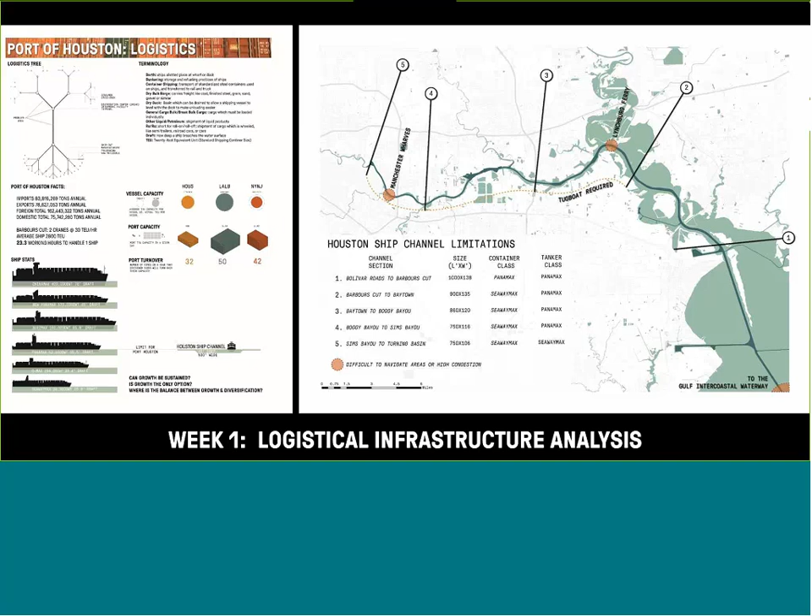Week 2, we went out to the bay and started to meet with the Audubon Society and other people that have an interest in the bay. Then we started to look at how these enormous chemical plants impact the bay. They provide a lot of funding to rebuild habitats, but of course at the same time they also create a lot of pollution, both in the water and in the air. Then we met with all the various mayors and municipalities that surround the ship channel to understand their issues.

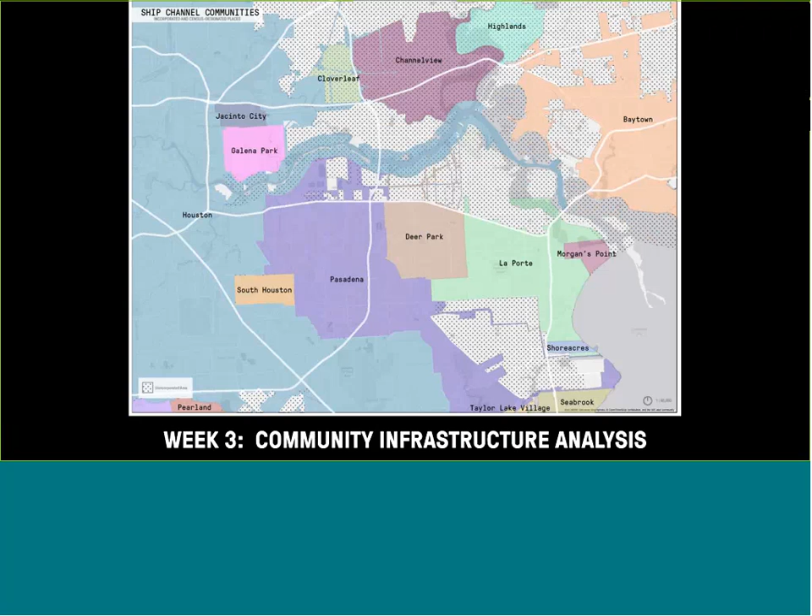And then at the end of it, we did a big presentation. The county commissioners came, we had city council people, we had all these people from the port, different mayors and organizations from different cities around Houston that showed up. So it was a big deal. And again, we really used it to try to say, look, SWA, we're the guys at the leading edge of infrastructure and understanding what that means to cities.

Now I think we're going to get a little bit into the project itself. Here on the screen, you see an innovative way to map Port of Houston through the flows and dynamic forces coming through it. That's what we were trying to push the students and ourselves to figure out, how do we define Port of Houston as landscape, because a lot of that is predicated upon how we visualize Port of Houston as landscape. So it started from the mapping techniques and went all the way into some design proposals.

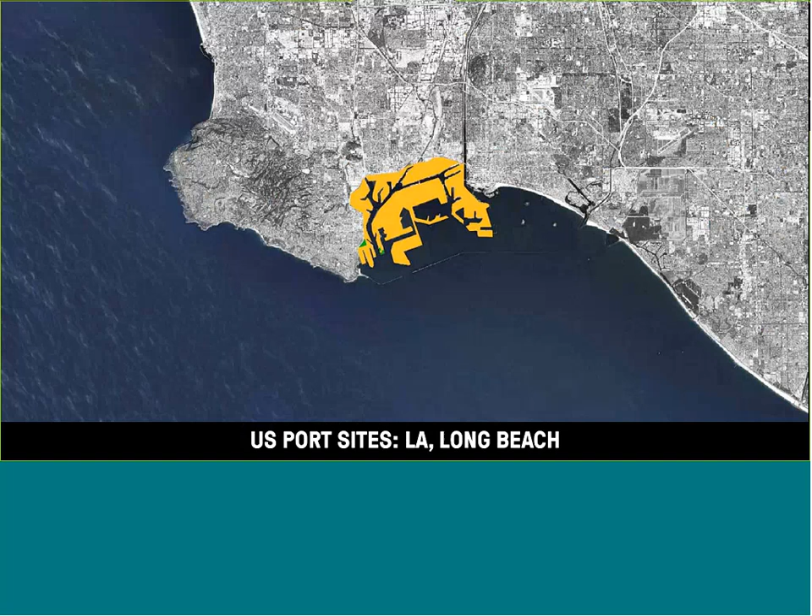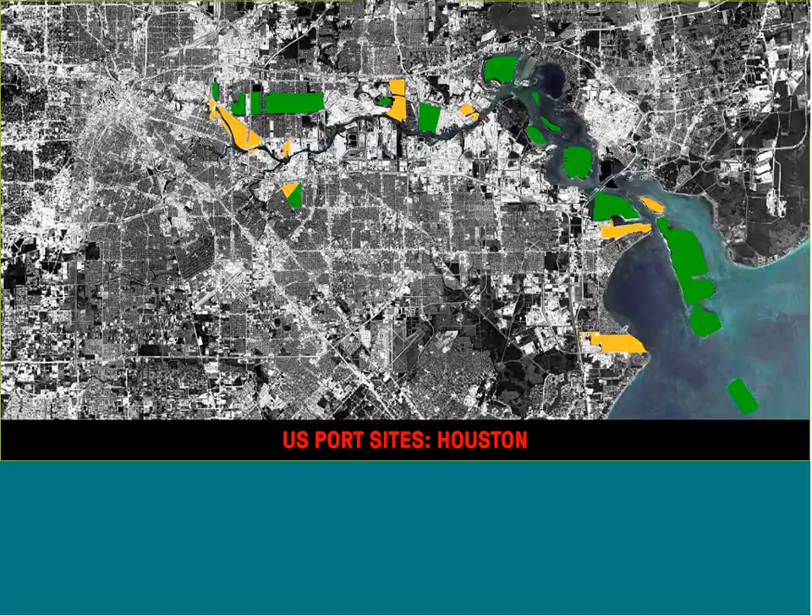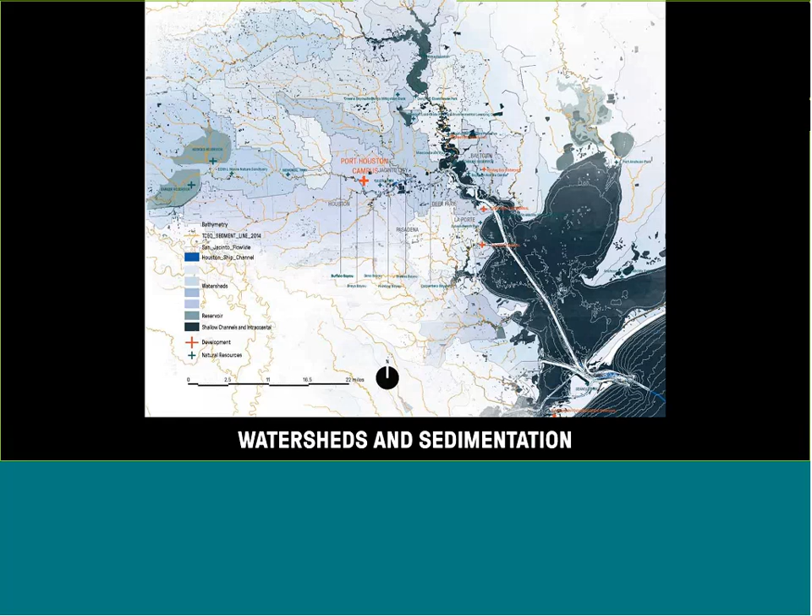So what's unique and interesting about Port of Houston versus other national ports, such as Port of Los Angeles, Port of Miami, Port of New York, New Jersey, and Seattle—here you look at Port of Houston, you can immediately see the difference, how vast and expansive it is in terms of its land ownership. The reason being, unlike all the other ports, the unique quality of Port of Houston is that it makes land. All of the sedimentation running into Buffalo Bayou eventually has to be dredged out and results in formation of islands in the bay.

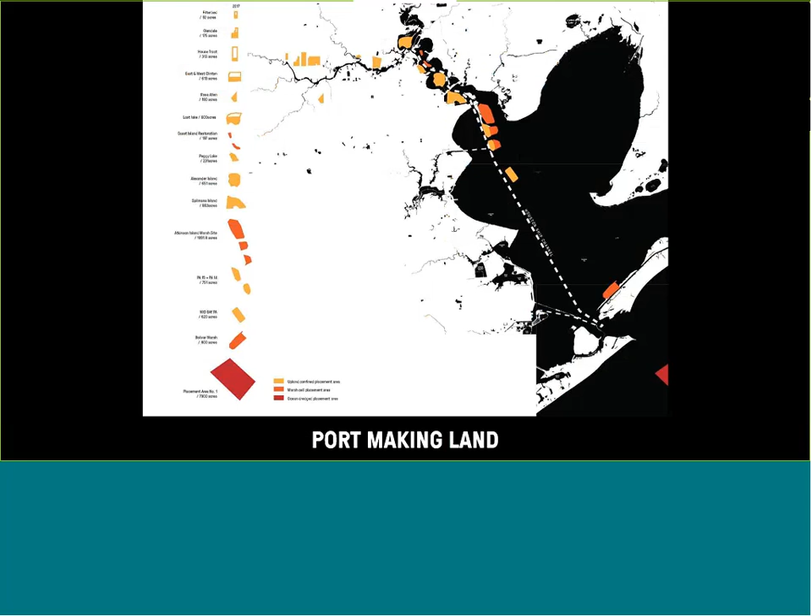And so all of these shapes in yellow and orange that you can see on the screen is what the port has made over the years of its operation, which is completely remarkable when you think about real estate creation by the sheer fact of this entity's existence.

And another interesting point about the port throughout its history is, as Kinder pointed out, it started out at Houston downtown, where Buffalo Bayou Park ends now, and over the years, because of the limitations of draft, it did not allow larger ships to come in.

Port of Houston moved from downtown on the left of the screen to its current location, and the dynamic changes keep on going - urbanization currently is encroaching on the edges of the port from the west, and draft limitations are still pushing port operations to the east, because ship technology is constantly changing as well. In the meantime, dredging operations keep producing these mounds, lands and islands in the ship channel.

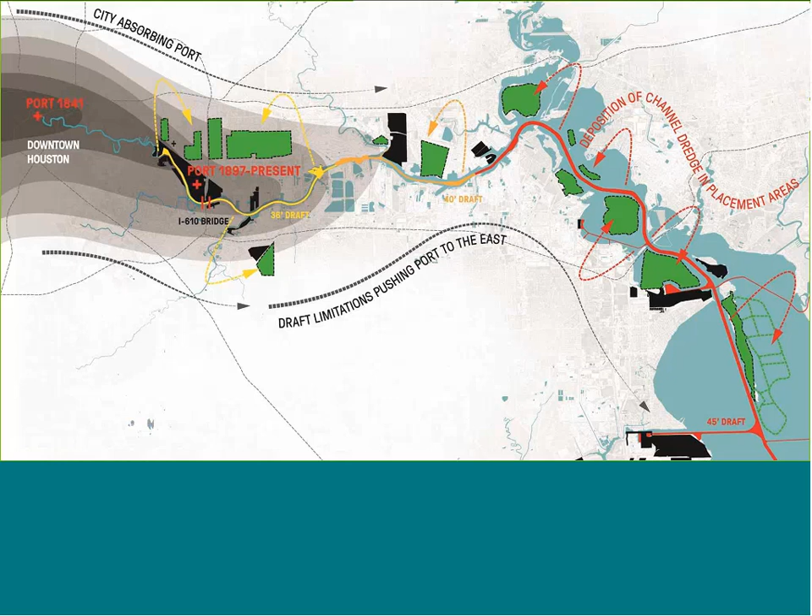So these conditions created underpinnings for our approach to the project and selection of the site, because obviously in 8 weeks' time we cannot take on 40 miles of ship channel and adjacent lands, and we really had to be strategic in what would be the most beneficial areas of study for us and for the students as well.

Because of this encroachment from the west and this expansion to the east and to the bay, we thought that these opposing sides on far edges of the port would be most affected by the change. And therefore, we wanted to take on those sites that were anticipating change to happen to them going forward.

We were interested in what would happen if we brought a landscape architectural approach to the logistical landscape of the port, which is never thought of in terms of parks and recreational areas or community connectivity - those kind of terms at all. It's just always thought of in terms of logistics and industry.

And we applied the principles that we would normally use in the project, such as striving to provide connectivity and accessibility, enhance legibility and aesthetics of the site, as well as creating programmatic activation to the degree that it is possible, where the communities interface with the port and where it's safe for people to interface with the port. That would make sense.

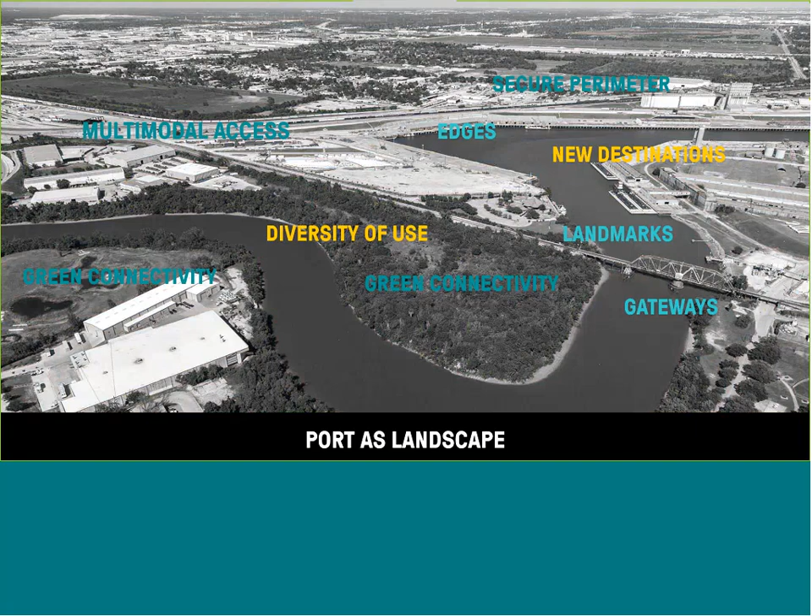And this is what - you start applying the lens of landscape architectural methodology, and you start looking at the port site completely differently.

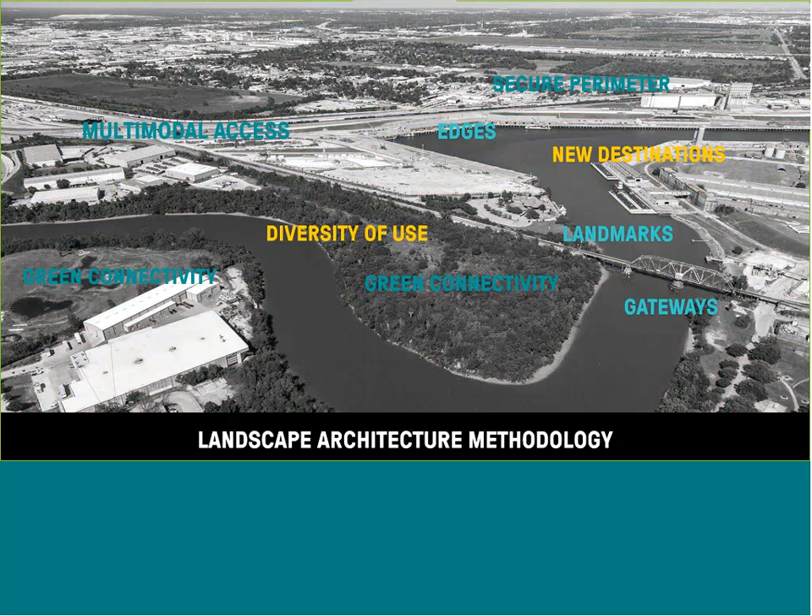So firstly, we are going to look at site 1, which is closer to the core of Houston.

As Natalia mentioned, there are many unique aspects to the port, one being that it's really embedded into the fabric of the city. So you get conditions like this, where you have neighborhood right next to industry, and you have open spaces, such as, in this case, Morgan's Point Cemetery, right next to the container cranes in operation as a backdrop. So it becomes a really surreal environment.

This is what we looked at - let's see this pointer if I can. What we really looked at was the last 2-mile stretch of the ship channel for this site, and another site which serves more of the ecological services to the east near the bay. So the last 2-mile stretch is in a highly visible position in the city.

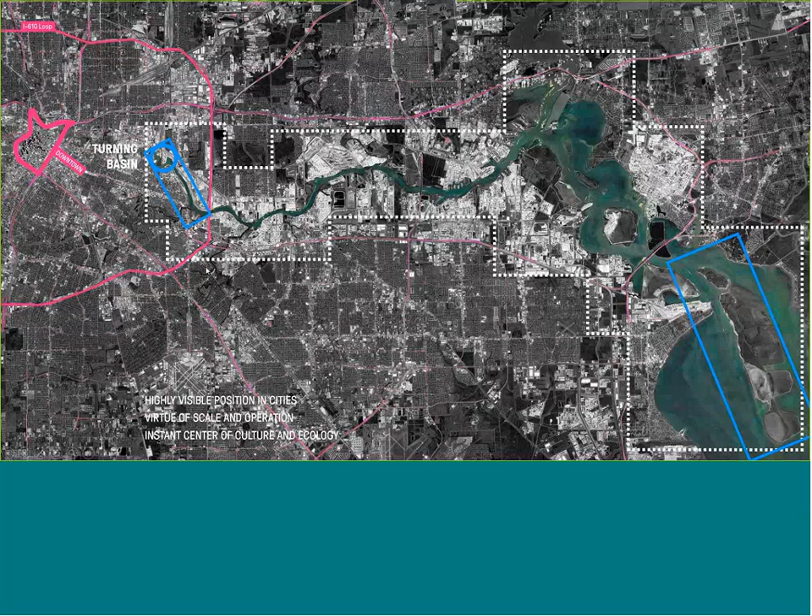It's along the 610 loop, which really begins to frame Houston, the Houston expanse, with downtown being centrally located. And by virtue of its scale and operation, we knew that it could become an instant center for culture and ecology.

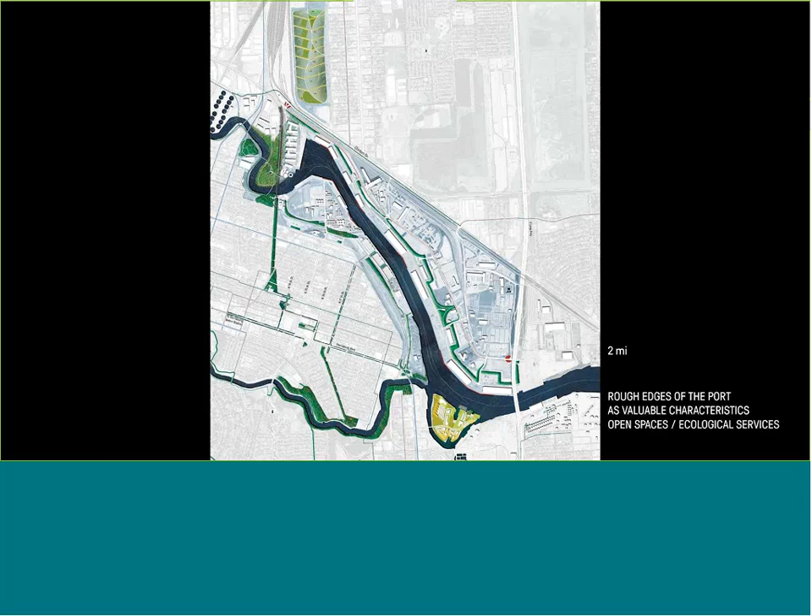So what the students and us started really looking into was how to transform these rough edges of the port, again, as valuable characteristics. And they began to inlay it with soft systems of open spaces and ecological services. We specifically looked at these 3 opportunities within that 2-mile stretch.

The north one being more active programming, with soft elements like a neighborhood park, transforming the dredge island of the port into a neighborhood park that gives back to the community. Centrally, looking at transforming some of the existing warehouses into active urban programs, and then also transforming an existing program that is already embedded with one restaurant and some other neighborhood activities, and really amplifying those characteristics to serve the neighboring communities.

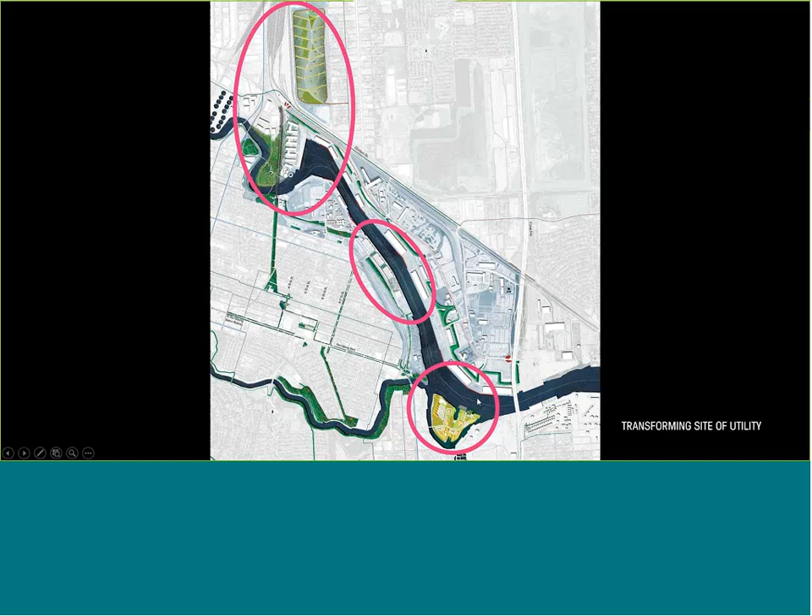What we also looked at was introducing a green system, a green belt loop around this development that begins to really tie in and thread in the communities and also the mobility systems that exist around there.

So, as Natalia mentioned earlier, knowing that the north side of the ship channel has the potential of becoming almost obsolete as we look at the post-Panamax era, where ships are getting too large to even navigate the northern part of this area.

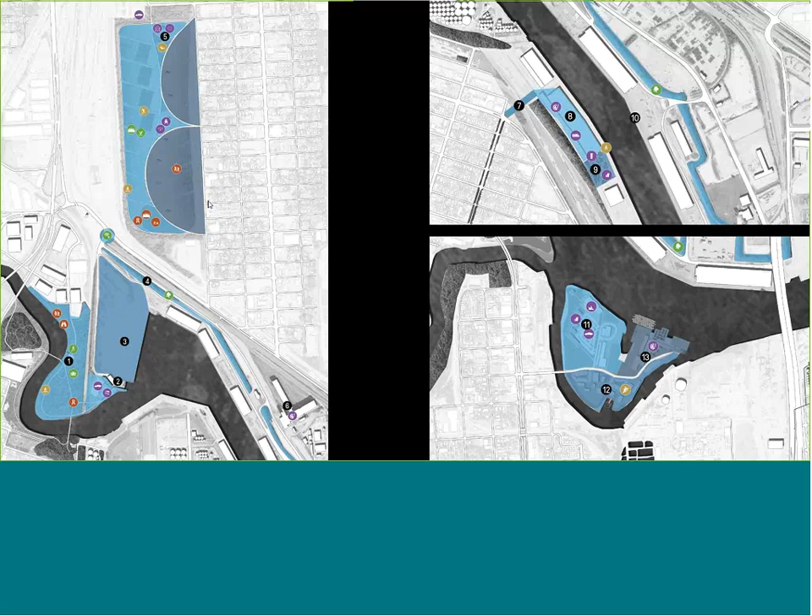So to really look at orchestrating urban development in terms of understanding what sites would be available in the future and what sites are available now, so the Port of Houston can look at embedding a program that could begin to think in terms of the near future and also maybe 30 years from now, where they begin to occupy this part of the site that is an existing port function.

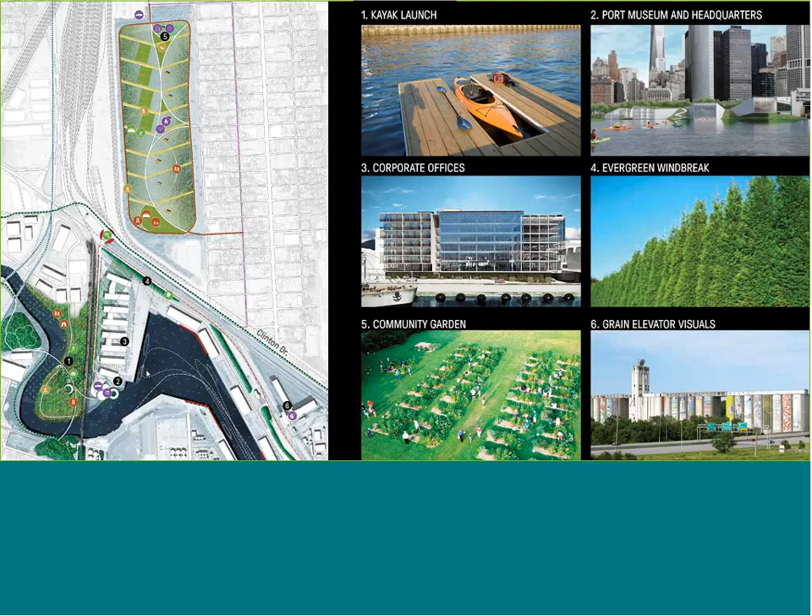So again, just embedding programs that begin to address community needs while giving Port Houston an identity within the city of Houston. And also introducing exciting programs that begin to frame arrival into the port, a gateway experience that begins to not only frame Port of Houston, but also frame the visitors' understanding of their own city, understanding of how the port operates and how the surrounding neighborhoods are meshing with the port.

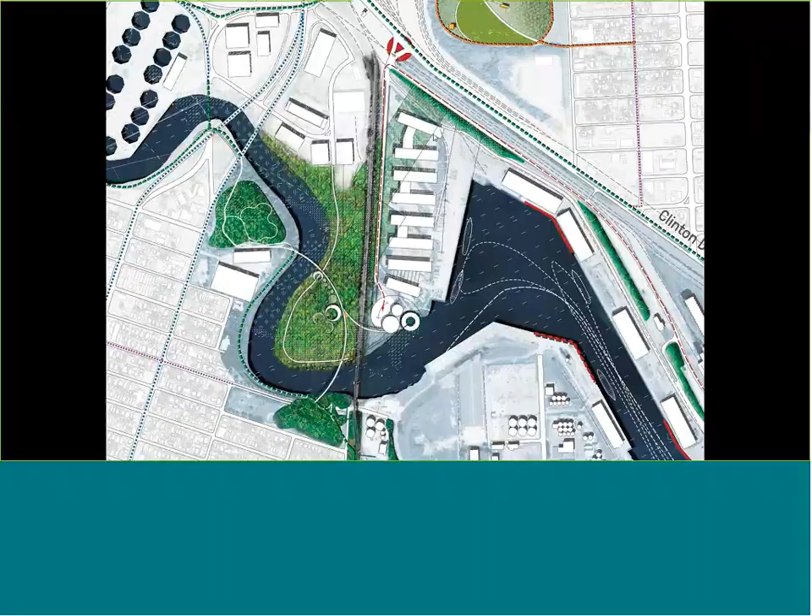The second site that we looked at within this zone was really occupying existing warehouses and converting them with programs that again begin to address nearby communities, but also make the city of Houston aware of the opportunities that exist on the port.

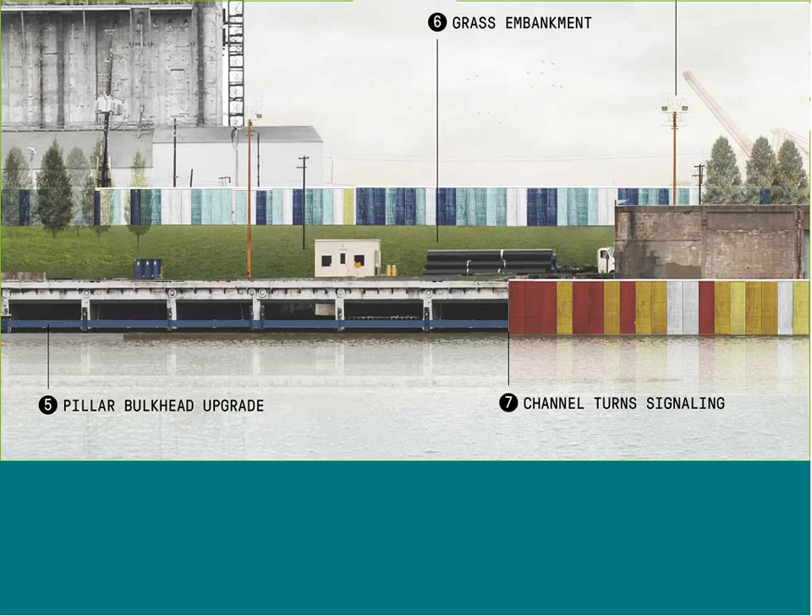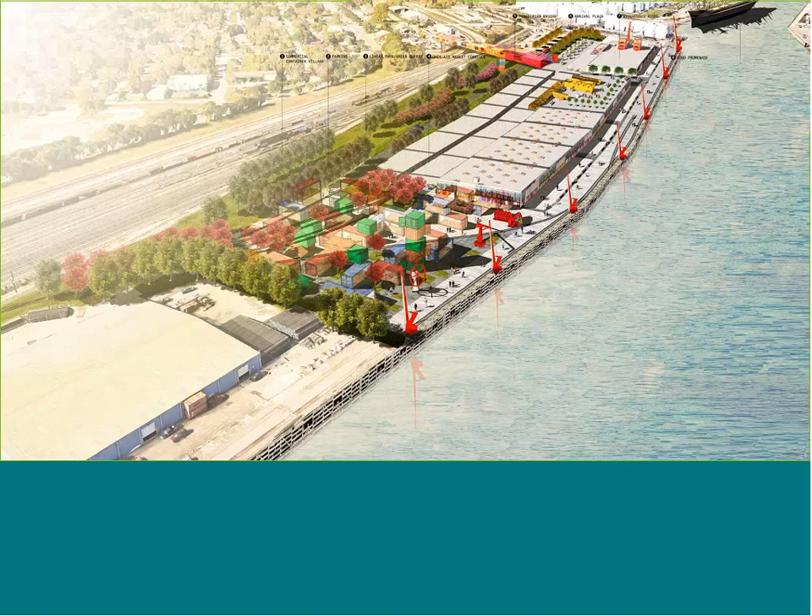The north side of that area, we looked at introducing more branding and identity opportunities, really amplifying the rough edges of this port environment with simple paint strategies and some structural modifications to the bulkhead. And we also looked at converting the warehouses into commercial and retail opportunities. And again, this is really trying to activate the waterfront.

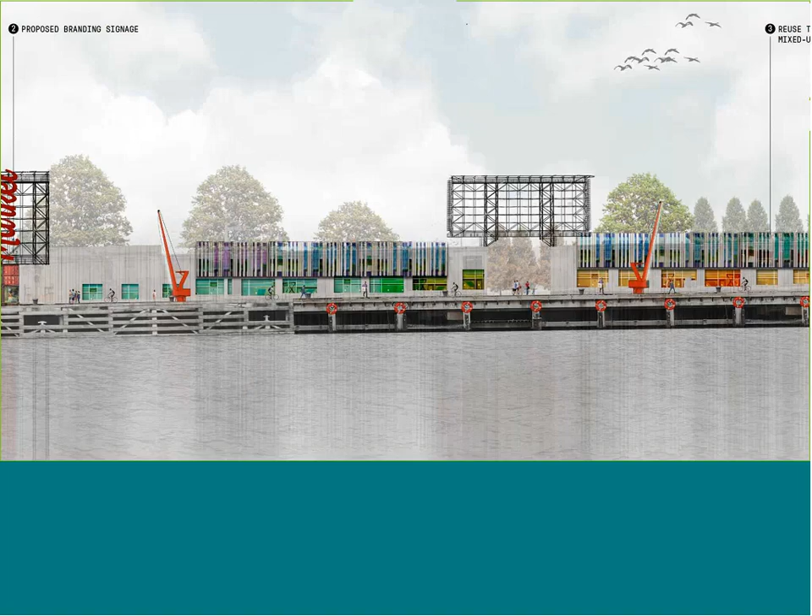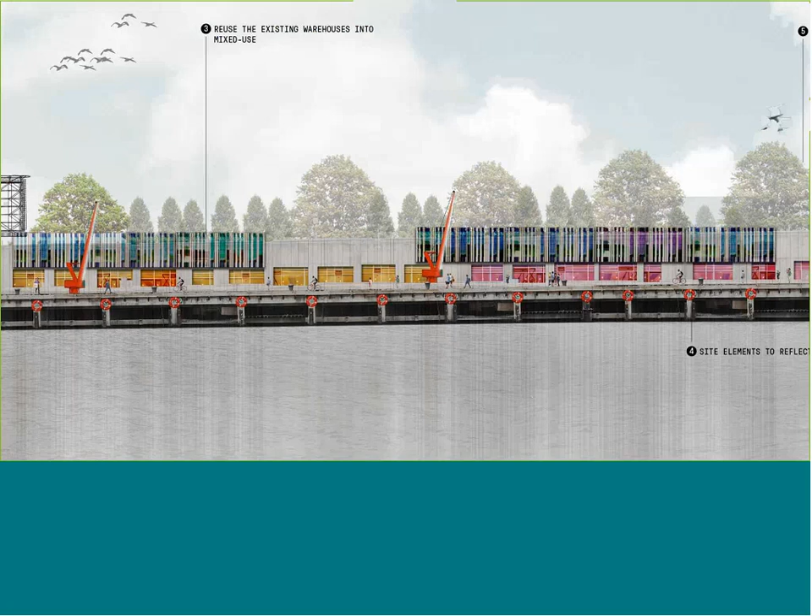So the students began to really understand how, some of them actually came from business and finance backgrounds, so they understood development strategies. So they were really interested in seeing how this could amplify this part of the port and how this becomes something that actually supports Port Houston's functions at the same time.

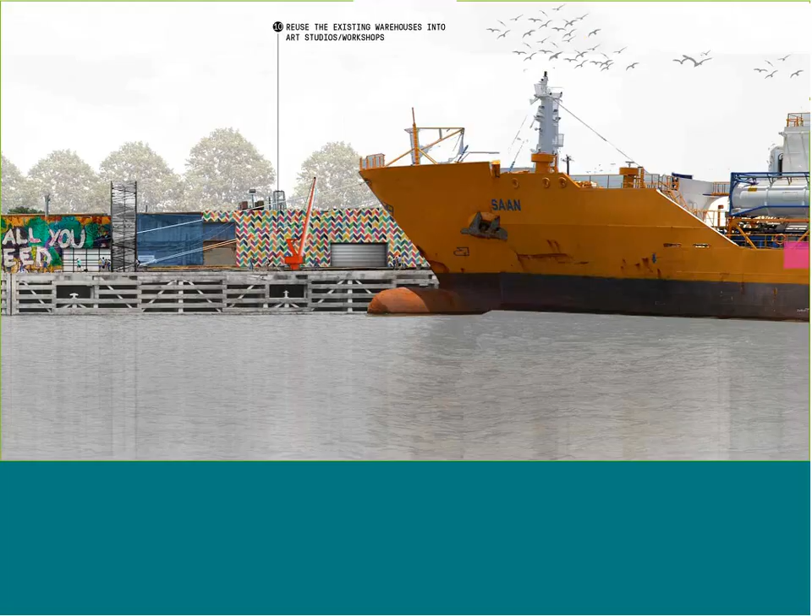So embedding it with waterfront strategies that begin to introduce physical characteristics, borrowing design strategies from the port kind of environment, and altogether just bringing the city of Houston and the surrounding community to the waterfront, which is an opportunity that is not currently available at the port, specifically for security reasons. But we also worked out a strategy where we could redefine the boundaries and the security fences to give access to the waterfront.

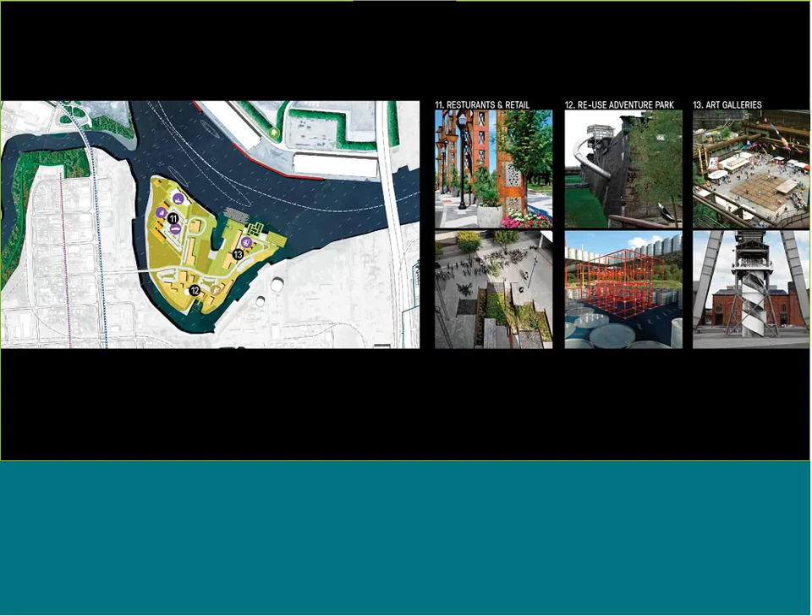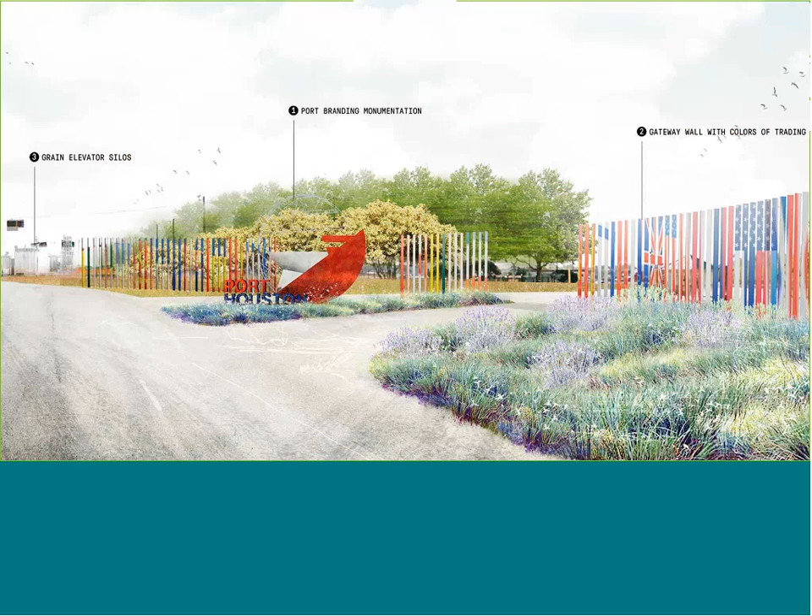This one just begins to introduce other additional programs to amplify existing community and activities that are there. And ultimately, we looked at how do we introduce a branding monument that begins to give Port of Houston a new identity that is more about working with the community and introducing ecological services that benefit the surrounding communities.

Hello, everyone. This is Michael. I'm going to talk about the ecological framework, which are the islands to the east. We think these are a good complement and counterpoint to what Anna just showed you.

The more urban water edge condition that's being transformed by the encroachment of the city. This is a completely different opportunity, both in terms of the project, but also in terms of thinking about future landscape architecture practices of making land and working with a sort of tabula rasa condition. So thinking about what is the landscape experience out towards the bay in this kind of vast landscape?

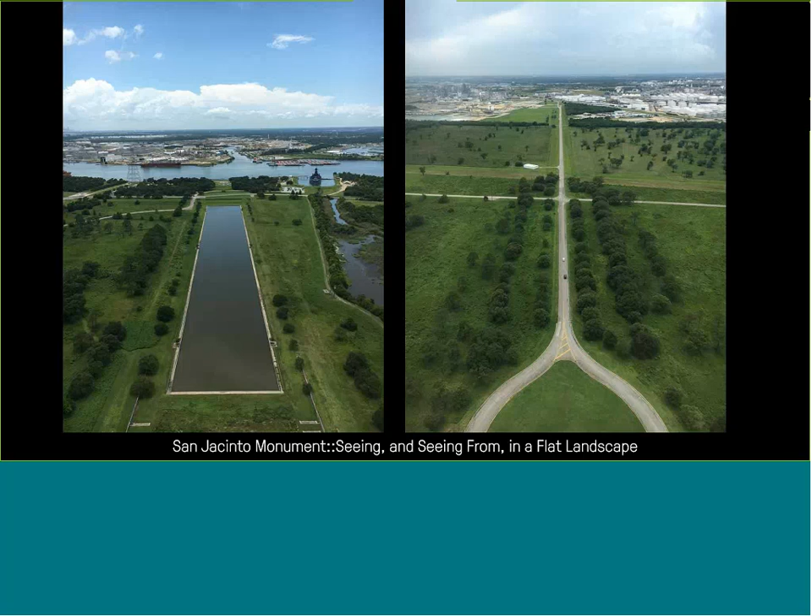And these are views out the top. Again, it is on an axis, but it's this kind of degraded Washington Monument feel of the landscape. So it's not maintained to that high level, but it is a memorial landscape that you have to drive out to, and it's disconnected from a lot of the cities and communities around it.

And so how does that get translated into a workable principle for our project? This is Evia Island, and so this is another artificial island. I think it's produced by Audubon. It's basically designed to maximize migratory bird populations landing and nesting on it.

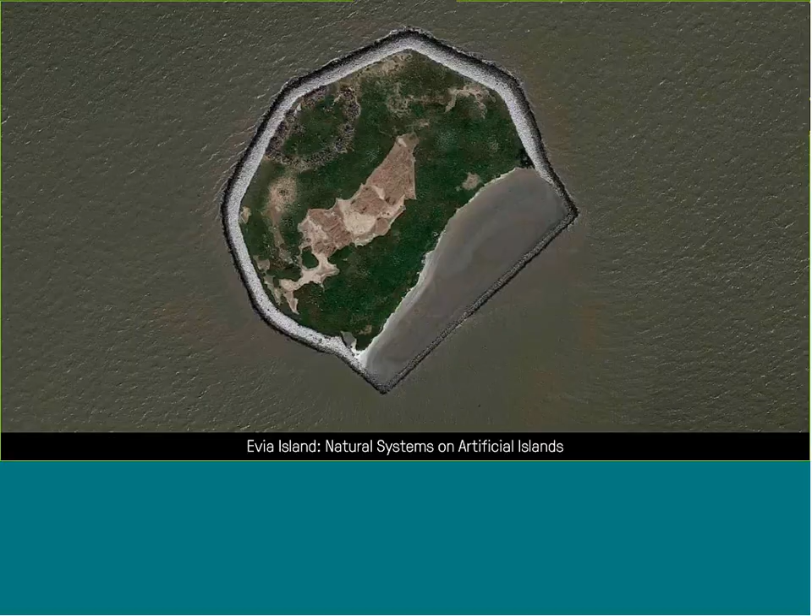You can see that when you zoom in, what first appears as like a riprap edge are actually just a high density of shorebirds. And so this is kind of the testing ground for creating a diversity of habitats that are going to attract different types of migratory birds. And there's a lot of parameters that go into the design and siting of this. So, for example, you have to be a mile offshore so that, I guess, a coyote can't swim to it and eat all of the babies.

Again, it's this idea of creating legibility in a landscape that is artificial, it's created by people. So how do you let visitors know that it's not a natural formation? And so thinking about abstracting those forms in terms of how they're going to start to produce programmatic opportunities out on the islands.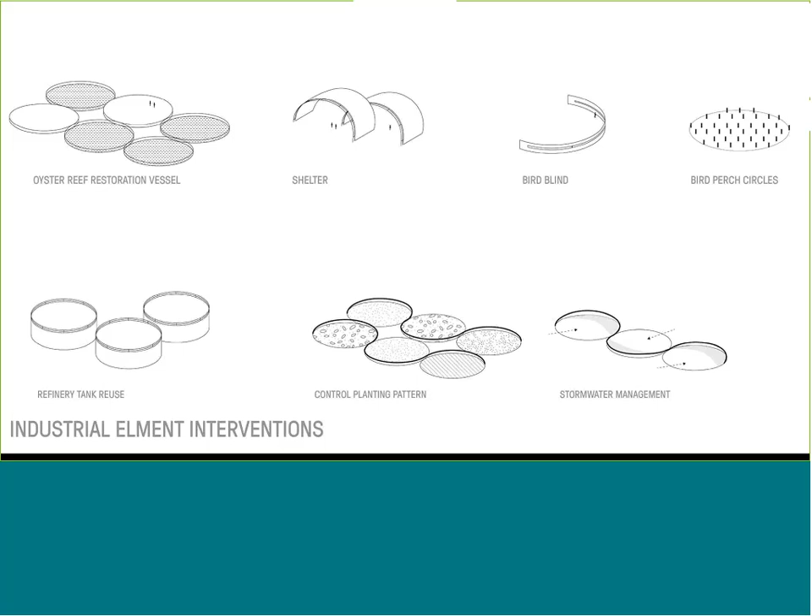So thinking about oyster reef restoration, shelters, bird blinds, bird perch circles, reusing the tanks, controlling planting patterns through various arrays and forming patterns out of that, and then stormwater management. So again, very simple, but when you begin to aggregate and interface these with other systems, it produces a simple and workable way of inserting program and form into the landscape.

And so here you can see the next level of development of that, putting these in a landscape to begin to provide opportunities and destinations that exist out on islands. So another critical difference with the island site from the urban site is that you have to actually have a reason to go out there. You have to take a boat, you have to know it's there, you have to want to go there, and so creating programs that are going to draw a diverse segment of user groups.

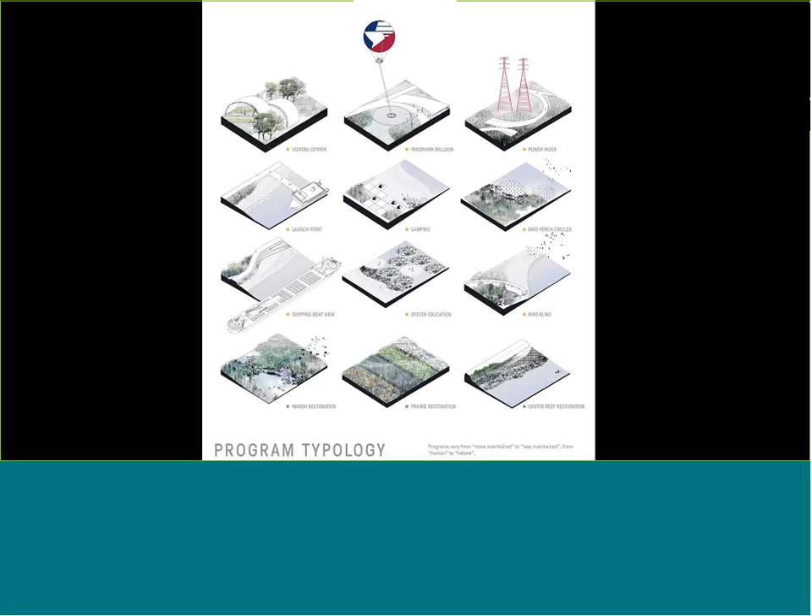They sliced through it to optimize the ship's path so they didn't have to go all the way out and around. And then gradually over time, Atkinson Island has grown from the continuous deposition of dredge that they use as one of their placement facilities.

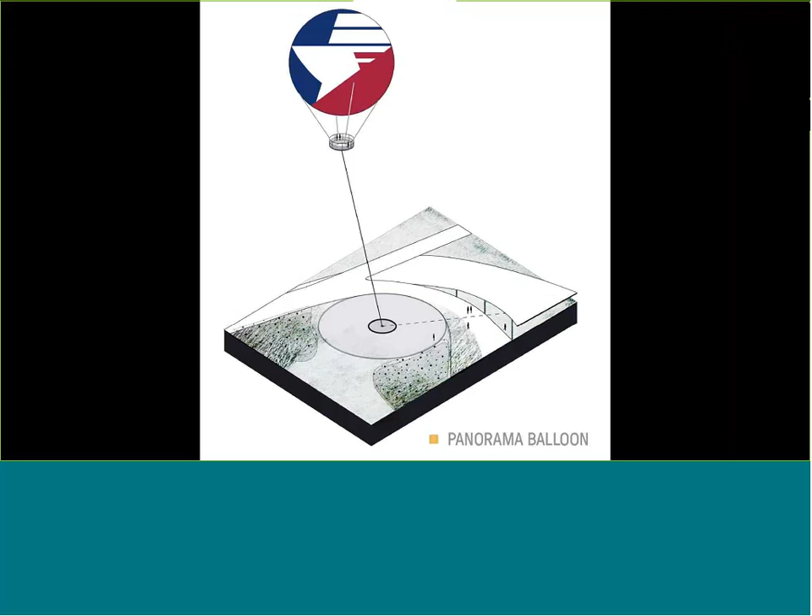So thinking about how, one, you can advertise Atkinson Island with a vertical landmark, and two, how do you get people out there with programmatic opportunities. So thinking about branding, using the port logo as maybe a balloon, which serves as a visual marker in the horizontal landscape, taking that idea of the San Jacinto Monument and converting it into a port brand.

So this idea of then moving over to the island, going up into the balloon and getting a vantage point out across the islands in the bay.

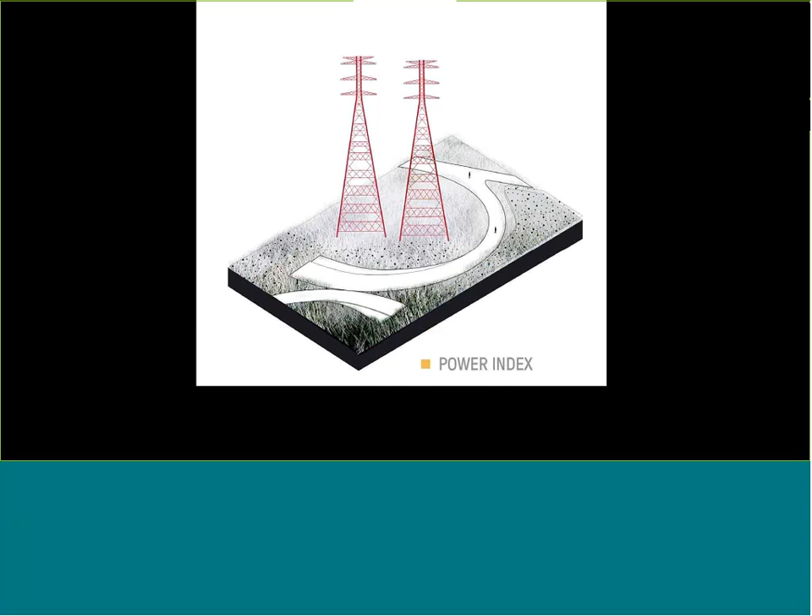And then again, using these simple industrial forms to modulate the planting so that it's a kind of field of native plants which are going to also help to attract different bird species on their migratory paths. The power lines, thinking of that as an index, in terms of it being a conceptual art piece, so painting them red.

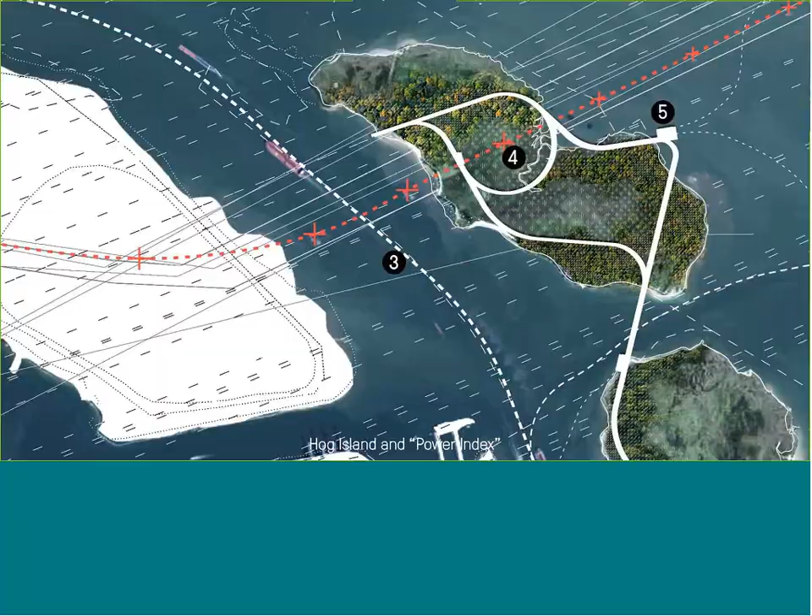This is moving north from Morgan's Point through the cut of that peninsula into an island. And so you can see, thinking of that intersection point as a gateway where these two transmission poles are painted and play up the entrance of a ship from the bay into the ship channel.

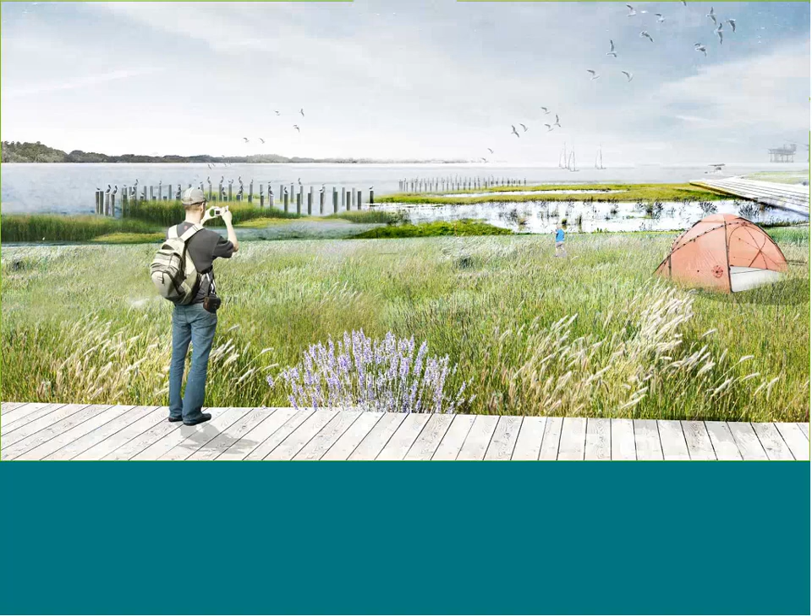We talk about places for people a lot at SWA, so we think about places for birds too, our non-human animals, our constituents as well, taking the simple geometries and creating bird perch circles. Again, trying to create a diversity of opportunities and habitats for all the different types of birds which migrate through here. That fosters...

People who are interested in ecotourism. Bird watching is a huge driver of the economy when you start to look into it here. And then looking south down the island at other opportunities.

Watching ships come and go is a big thing. They're these massive objects which are pretty sublime to look at. So taking an idea from Morgan's Point, where we saw this slope stabilization, and thinking about that as maybe becoming an amphitheater type scene where you can come, have a picnic and watch the ships go in and out.

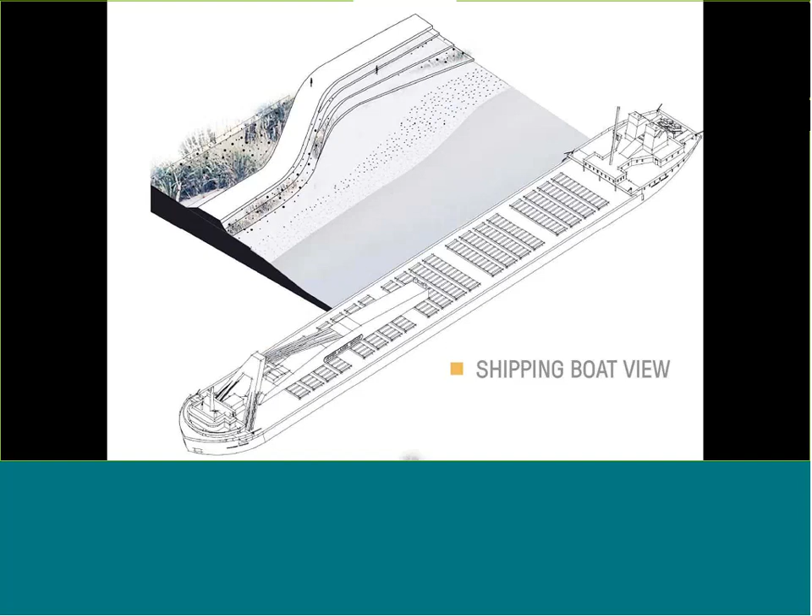And then thinking about the amount of oyster reefs which are presently in the bay and the role that they play in terms of water filtration, but also food and habitat production, and again, starting to make that into a publicly accessible amenity.

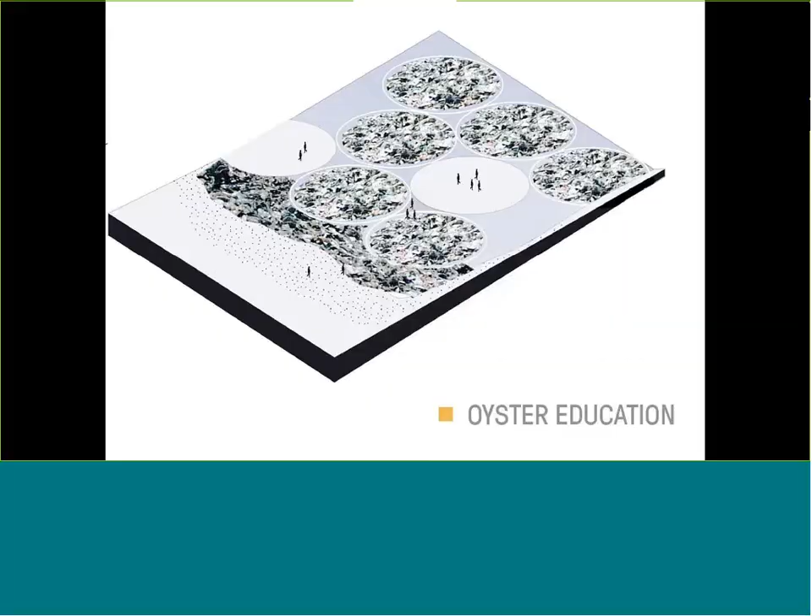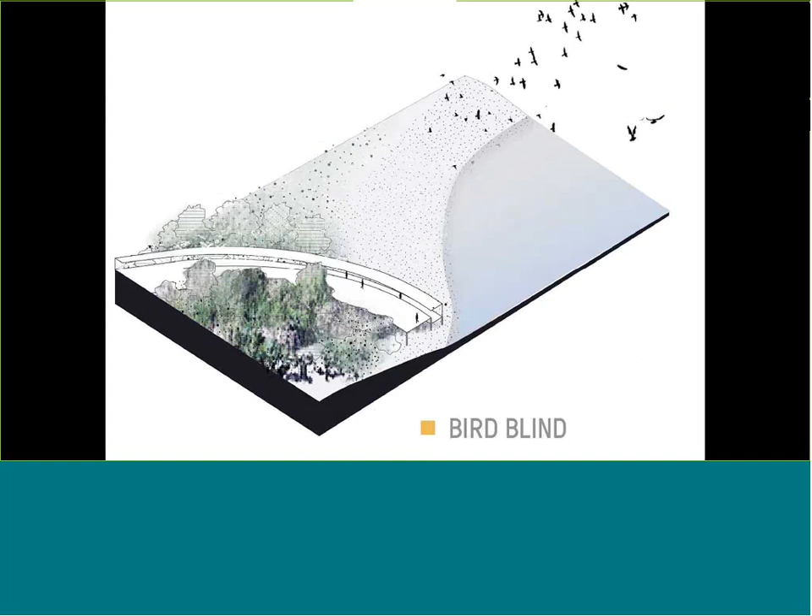Thinking about bird blinds, again, some birds are social, they don't mind people coming right up to them. Others are more shy, so providing opportunities for different user groups of birds and people to interface in meaningful ways. And then finally, Houston is Space City, so we have...

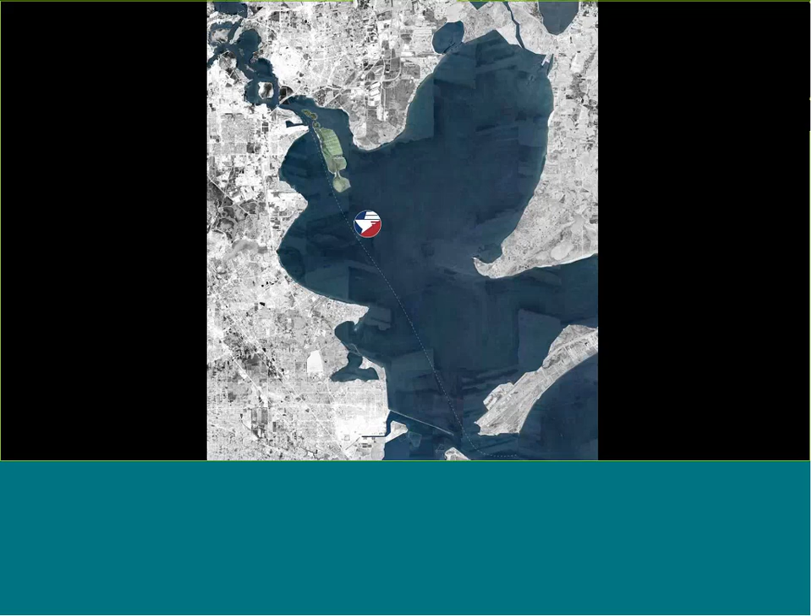NASA and this idea that we want to celebrate that. So what if we made an island with the Port Houston logo that you can see from space? This is an example of what that might be. It's very ecologically friendly. What we've included are a lot of different habitat types. You can see a marina so that people can access it. I think that's kind of where we are.